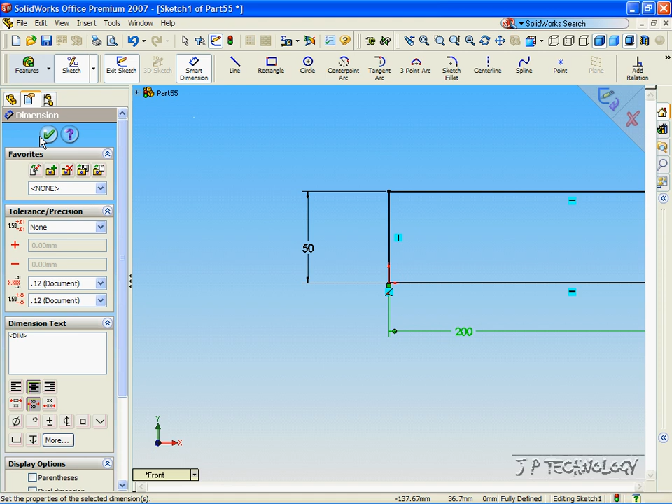To start off, let's sketch a rectangle on the front plane. Click the origin, click a point outside of the origin, and let's smart dimension this part to 50 by 200. Click OK, and let's extrude this out by 10 millimeters. Click Accept.

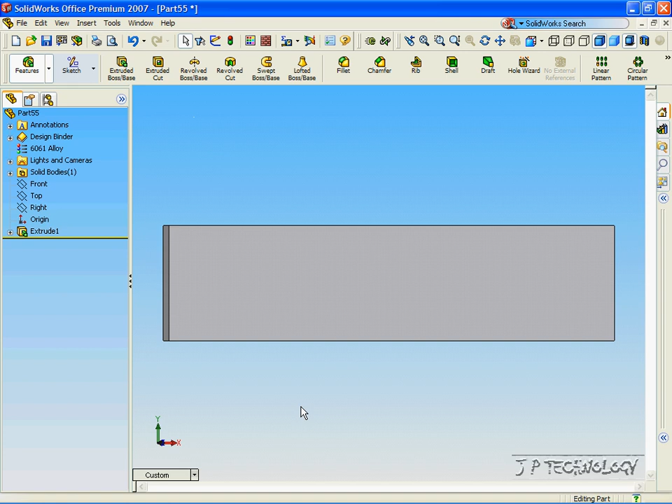Now click the front view, and we're going to have to make a reference plane that goes right through the middle of our part that we've made. To do this, click the bottom face, click Insert, click Reference Geometry, click Plane, and let's make the plane go right through the

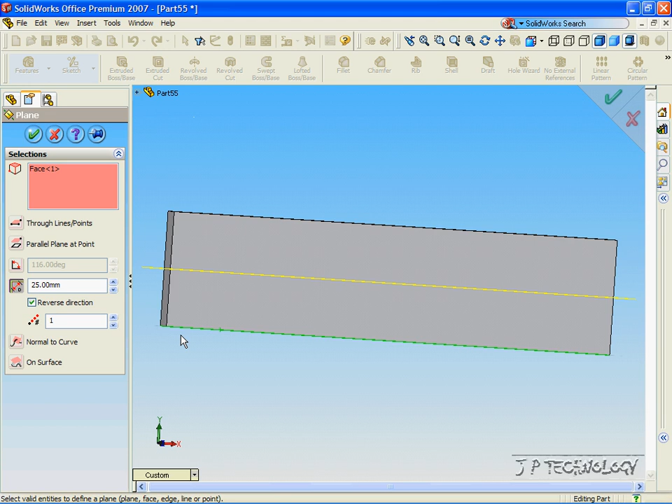middle. As you can see right now, it's below the part, and we need to reverse the direction, and now it's right through the middle, and it's at 25 millimeters, and that's what we want. Click Accept. Now everything that we make on top of this plane, we're going to mirror in the bottom of the plane.

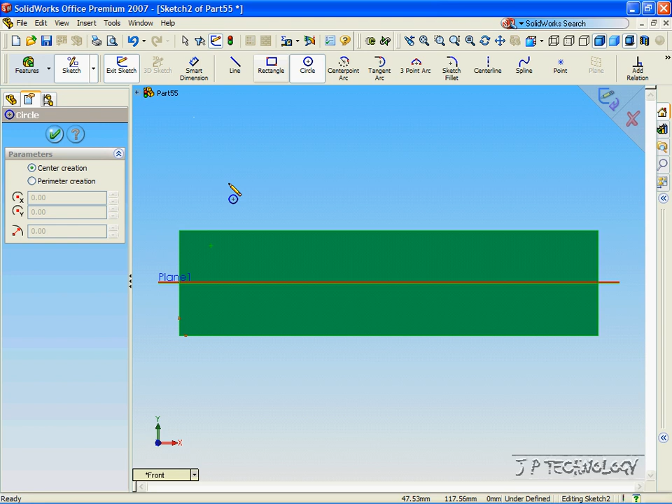Okay, so let's click the front view, and click Sketch, click the front face, and first let's draw 3 circles. Now let's draw a rectangle. Let's draw a triangle. And let's draw another triangle.

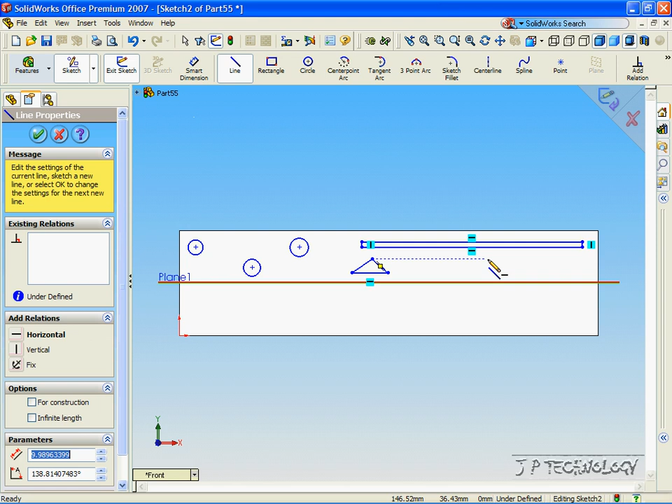Now let's cut these features out. Click Features, click Extruded Cut, and click Through All. And as you can see with the yellow lines, we're going to cut all of those features right through. Click Accept.

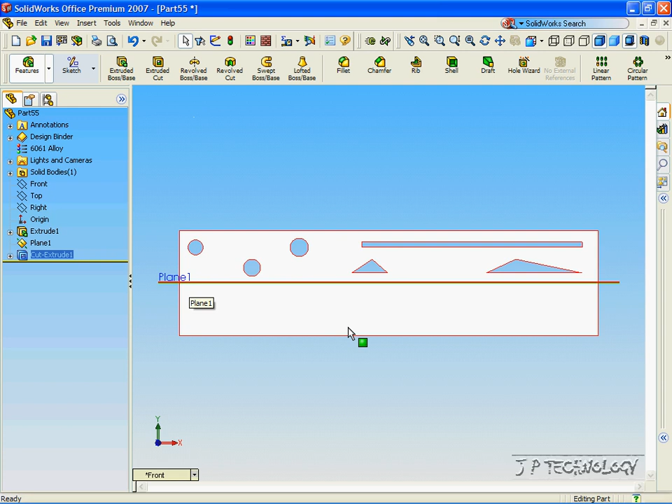Now all the features that we just cut out, we're going to mirror using that plane on the bottom half of the part. Now let's click Mirror, and we have to choose the face or plane that we're going to mirror, and that's going to be our plane 1 that we made. Click that. Now click the features to mirror, and they're going to be the extrude cut,

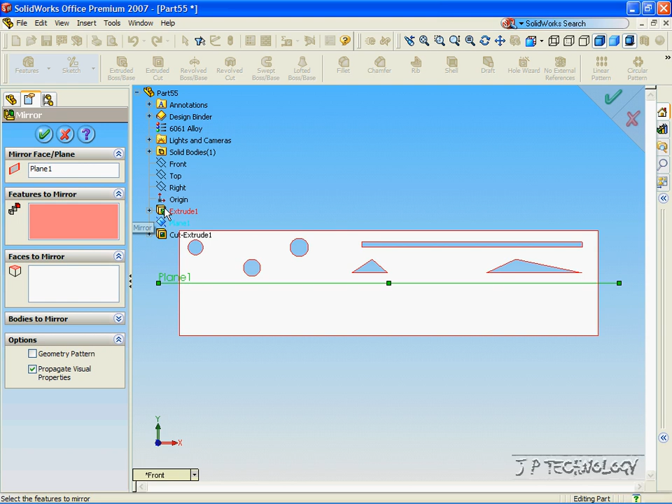and you can see the example with all the yellow cuts that are going to be made, and it looks correct, so let's accept it. Click OK, and now we've mirrored on the bottom half of the part. This concludes our tutorial on the mirror feature.